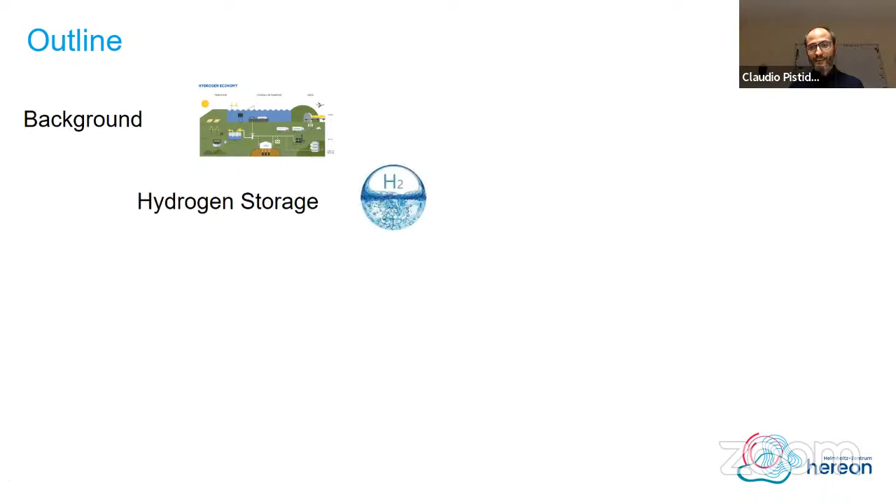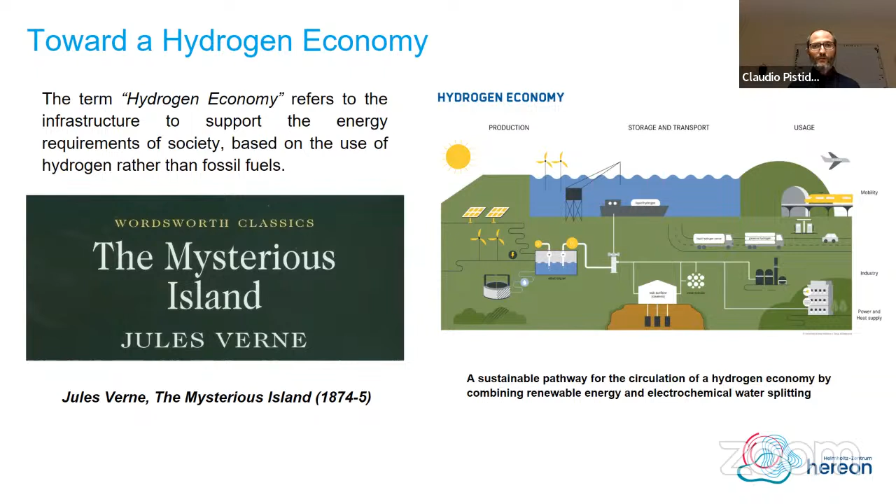Now let's move to a short outline of the presentation. We will speak about why we are trying to store hydrogen, what is in the background. Then we will see what are the properties of hydrogen as an energy carrier. And we will see that we can store hydrogen in liquid media, but also in solid chemical media. We are heading toward a hydrogen economy, that's clear. We know since long that hydrogen could be a really nice, friendly energy vector for renewable energy. So what do we want to do with this hydrogen in our hydrogen economy? If we look at the picture on the right side of the screen, you can see that we want to produce hydrogen in a sustainable manner, for example through electricity produced from renewable energy sources, then do water splitting, and then we have to deliver this hydrogen to several different sectors of our economy. The fact that there are several different sectors calls for solutions that are flexible, solutions that are different but efficient at the same time.

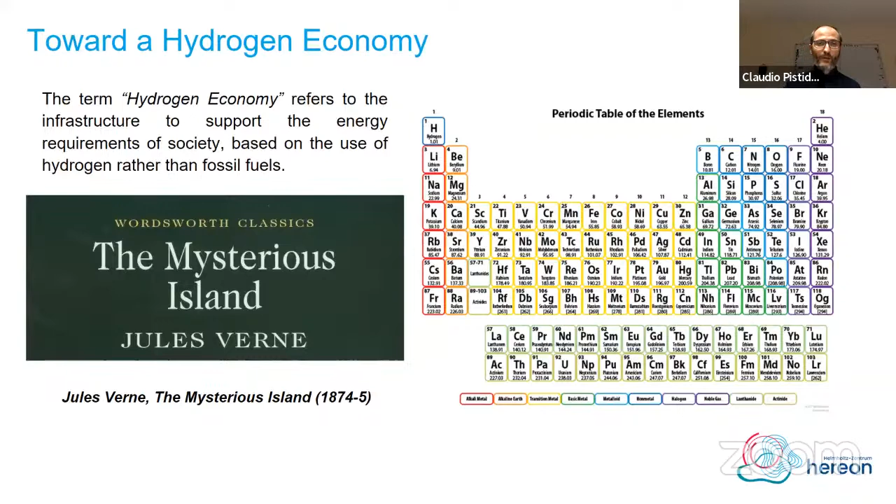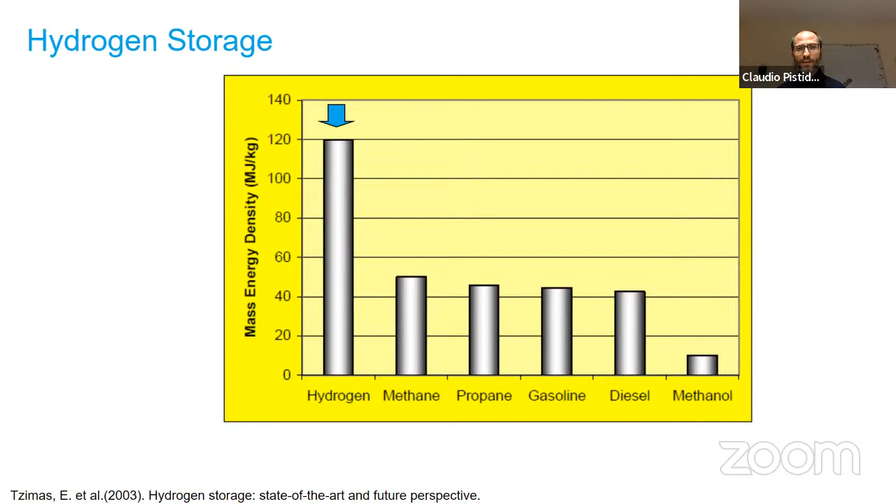Now, hydrogen, if we look at the periodic table of the elements, is located in the upper left corner. So it's the simplest of the elements in the periodic table. We are looking at hydrogen as an energy carrier for a simple reason. If we look at this graph here, where mass energy density of several different compounds is shown, you will see that hydrogen has the highest mass energy density compared with some of the most common fossil fuels. However, this picture is reversed when we look at the volumetric energy density.

Before we were looking at the gravimetric one. So at the volumetric energy density, what we can see is that hydrogen has a rather low energy density, even if we try to compress or liquefy to improve this value.

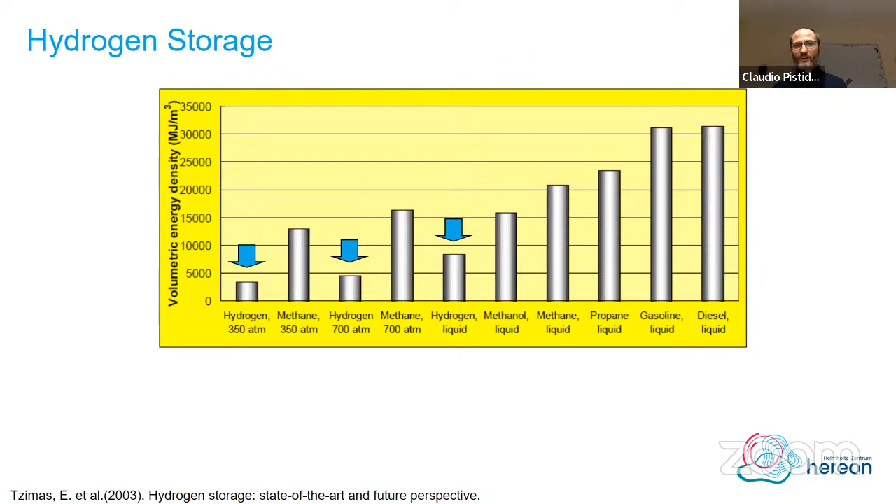Fine, these are general properties of hydrogen. Now we have to find a way to store or transport this hydrogen once it has been produced. There are several different approaches that can be summarized in two categories: physical approaches to store hydrogen, or chemical approaches. On the physical side, we can try to compress gas, liquefy it, compress at cryogenic temperature, or store hydrogen on large area surface materials like MOFs or carbon-based materials. These are physical methods where hydrogen is stored in its molecular form.

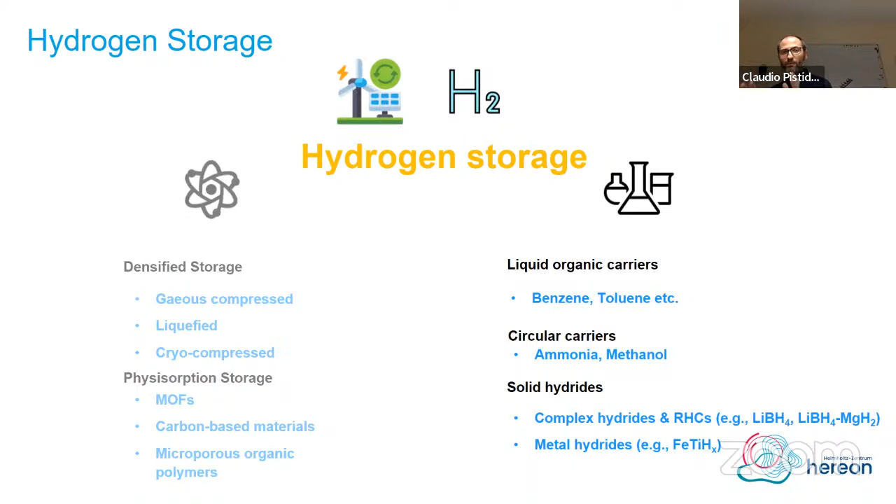However, we can also try to break this hydrogen molecule and store hydrogen, chemically bonding it in atomic form to a compound. So we can have carriers such as liquid organic carriers, for example benzene, toluene, or circular carriers like ammonia or methanol, or solid hydrides, where hydrogen is bonded to a metal or in a complex metal hydride. Now for today, we are interested in the chemical media, so we are looking at this side of the picture.

Let's start here. We said there are several different possibilities to store hydrogen. These two graphs give us an idea - for example, this graph on the left-hand side shows the volumetric hydrogen storage density for metal hydride, liquid organic carriers, ammonia, complex hydride, in comparison to hydrogen storage through physical methods. So we're speaking about liquid hydrogen and gaseous hydrogen.

You can see that the possibility to store hydrogen in chemical media gives us some opportunity to increase the volumetric hydrogen storage density. And if you look at this graph, you can see that this higher volumetric energy hydrogen density is achieved at conditions of pressure that are relatively mild.

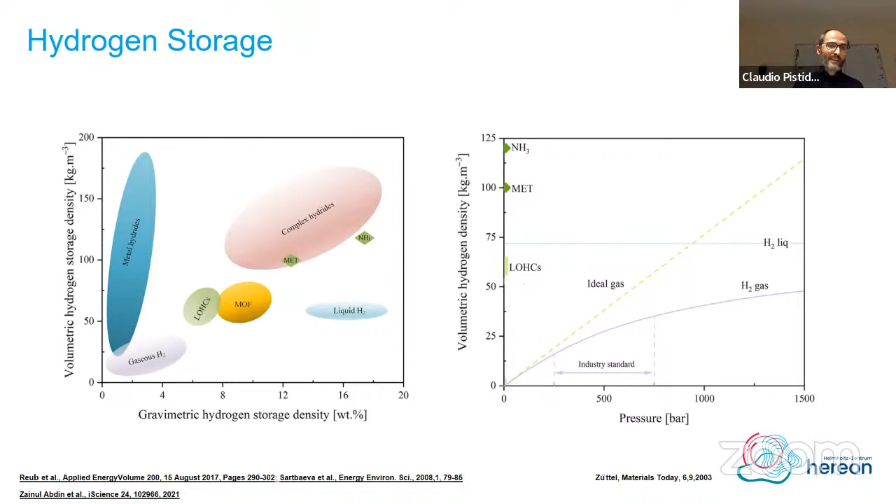In fact, if you want to achieve a high volumetric hydrogen density by compressing the gas, you have to go to extreme pressure, or like in the case of liquefied hydrogen, you have to go to cryogenic temperature, extremely low temperature, minus 253 degrees C. So that was a general picture of how storing hydrogen through chemical media may lead to an improvement of the volumetric hydrogen storage density.

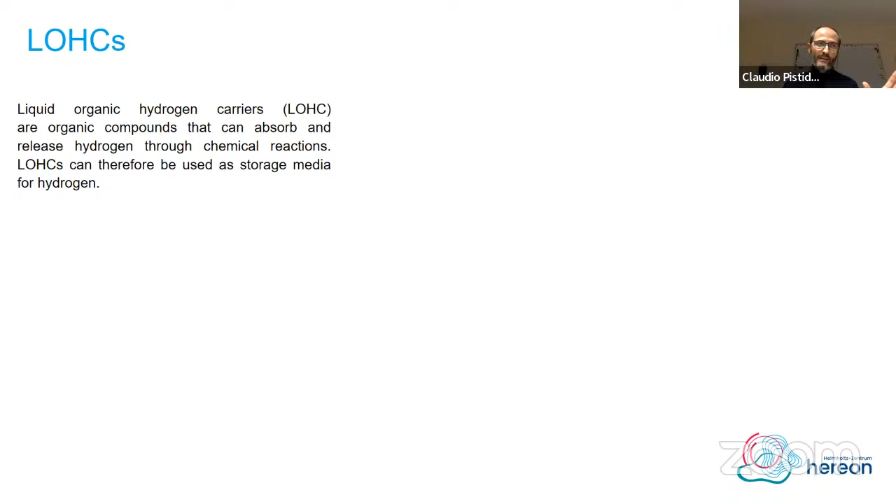And now let's move to the liquid organic hydrogen carriers. Liquid organic hydrogen carriers are organic compounds that can absorb and release hydrogen through chemical reaction. Now, so that is quite nice. So what does it mean? It means that these compounds have an unsaturated C-C bond, double bond or triple bond, where hydrogen can insert itself.

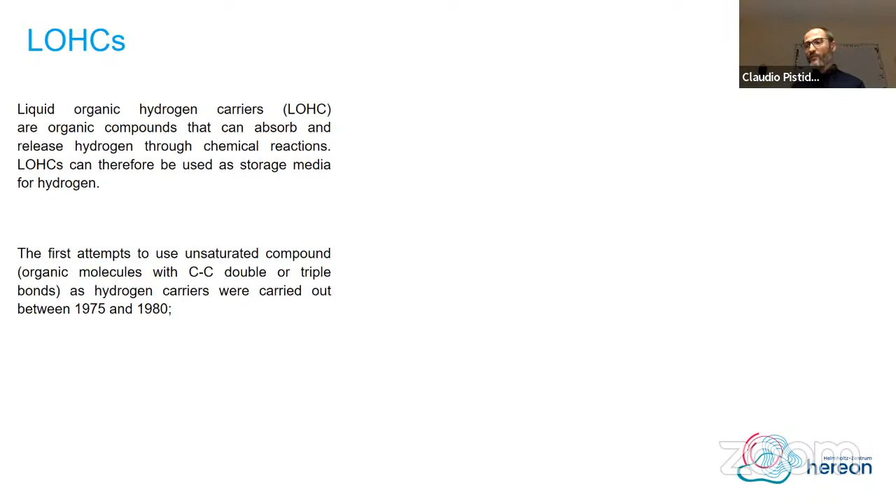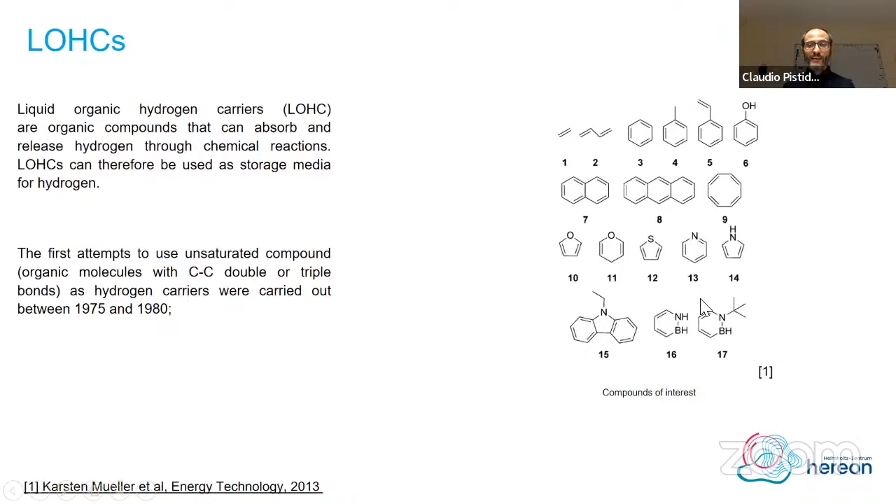This kind of material was studied since 1975, 1980, so it's quite recent. Here you can see examples of compounds that may be considered for such an approach to transport hydrogen. So you can see we go from extremely simple molecules to more sophisticated, more complex molecules.

Now, how does this insertion of hydrogen in this unsaturated bond work? You can see here an example of toluene, where we add hydrogen. And of course, the reaction doesn't occur spontaneously, although thermodynamically it should be favored. But in the presence of a catalyst at high pressure and temperature, what happens is that the hydrogen enters the bonds, and we move from toluene to methyl cyclohexane.

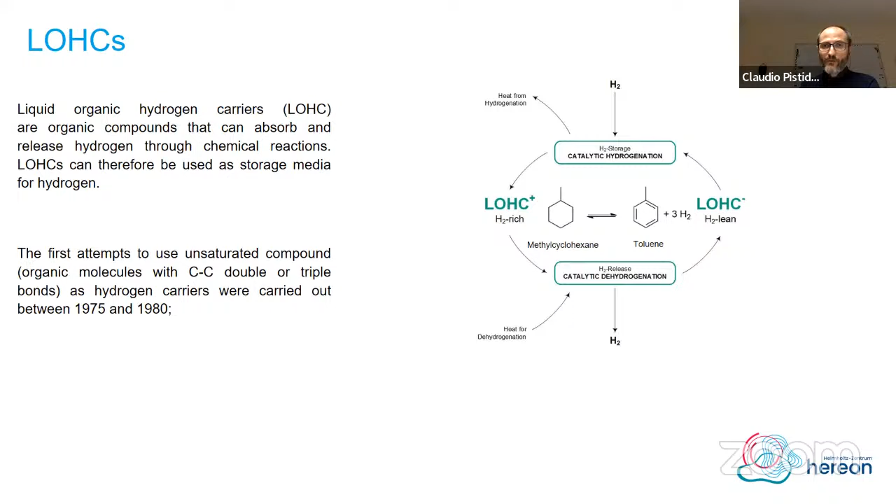And then, although this molecule is stable at ambient conditions, if we want to retrieve the hydrogen back, we use again a catalyst, and we work at low hydrogen pressure, practically ambient condition, but quite high temperatures. And then what we obtain is that we move back to toluene.

Now, here is an example of several different compounds that can be used for storing hydrogen. Some of them were shown previously in this graph. What you see here is how many molecules of hydrogen these compounds can take in. And you can see that this reaction theoretically should be spontaneous, because it's largely exothermic. However, without the presence of a catalyst and appropriate temperature conditions, this reaction doesn't take place, or occurs through sluggish kinetics.

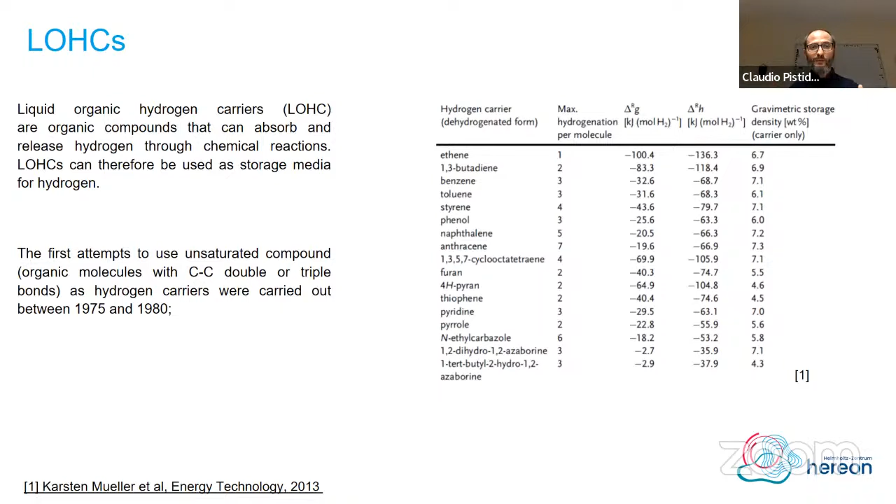Here you can see that the hydrogen storage capacity, expressed as a gravimetric value, goes from 4.3 to something like 7 weight%. This is not bad, but we have to keep in mind that this high reaction enthalpy will be translated later into high stability, and therefore the use of relatively high temperature, leading to a heat management of the storage system that is quite complicated.

Now, what can we say about the liquid organic carrier? The hydrogenation is exothermic. However, we need conditions of 200 to 420 degrees C to make it occur with acceptable kinetics, under a hydrogen pressure between 20 and 50 bar. It's not extremely high, but it's quite high anyway.

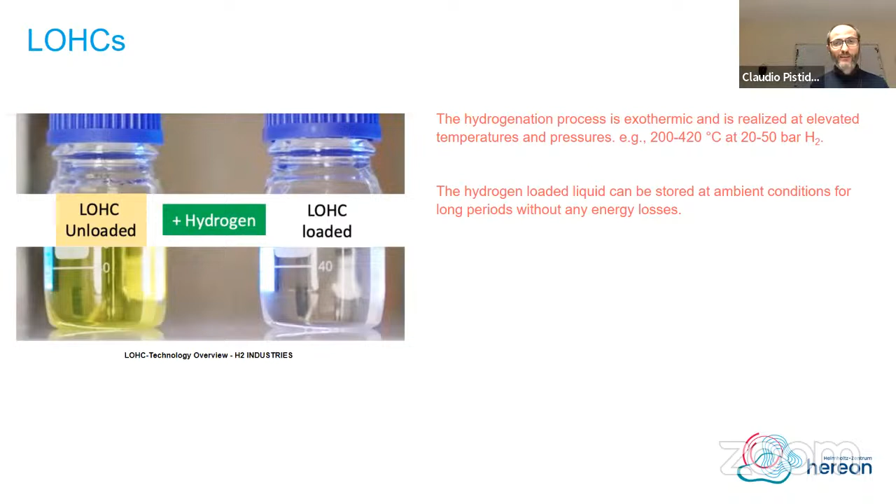The good thing is that once the hydrogen is loaded and the liquid organic carrier is hydrogenated, it's stable under ambient conditions, and you can keep the hydrogen bonded into the molecule for a really long period without anything happening. There is no loss of hydrogen, so the handling of this material is quite simple compared to gaseous or liquid hydrogen. Neither high pressure nor extremely low temperature are necessary.

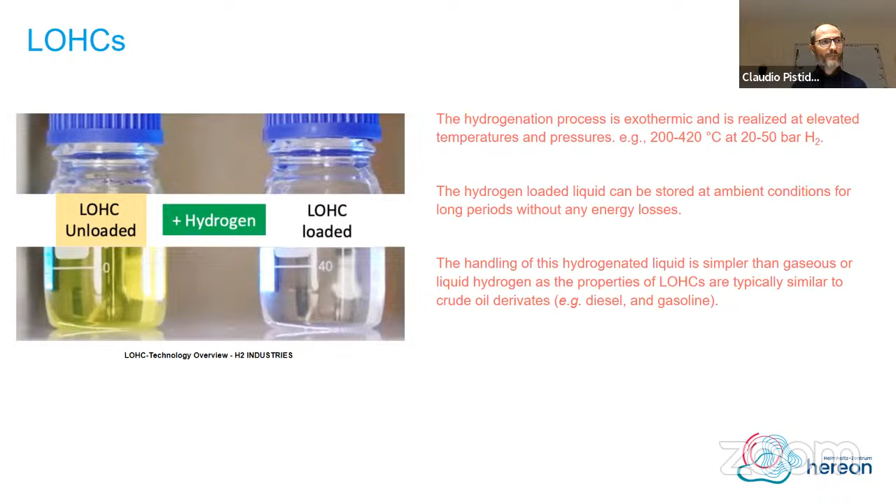In particular, these liquid organic carriers behave like some of the most common fossil fuels, like diesel or gasoline. So it's easy to transport, easy to pump, and no extreme care is necessary for handling them.

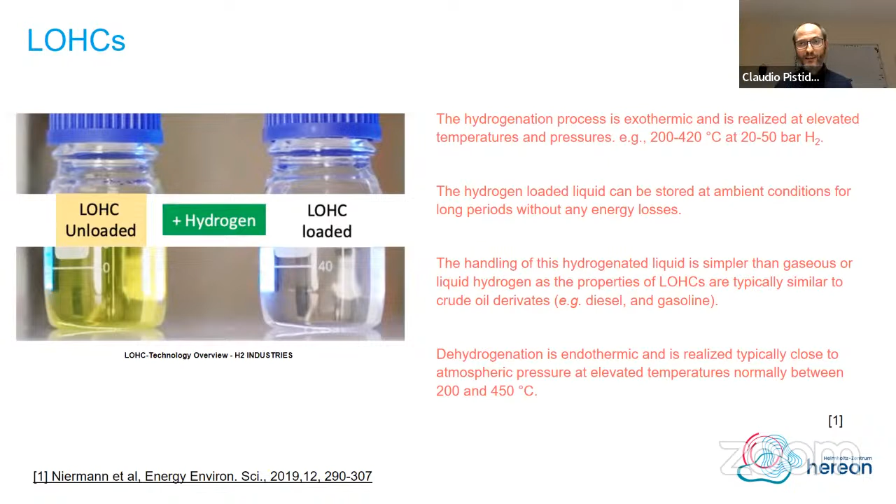On the other side, for dehydrogenating we have to provide high temperature and high hydrogen pressure, 200 to 450 degrees C, but the pressure is nearly ambient. What we can say more is that due to side reactions, once you cycle - you charge hydrogen, you discharge, you charge, you discharge - some of the capacity of this carrier is lost, and after a while the replacement of the carrier or of the catalyst utilized becomes necessary.

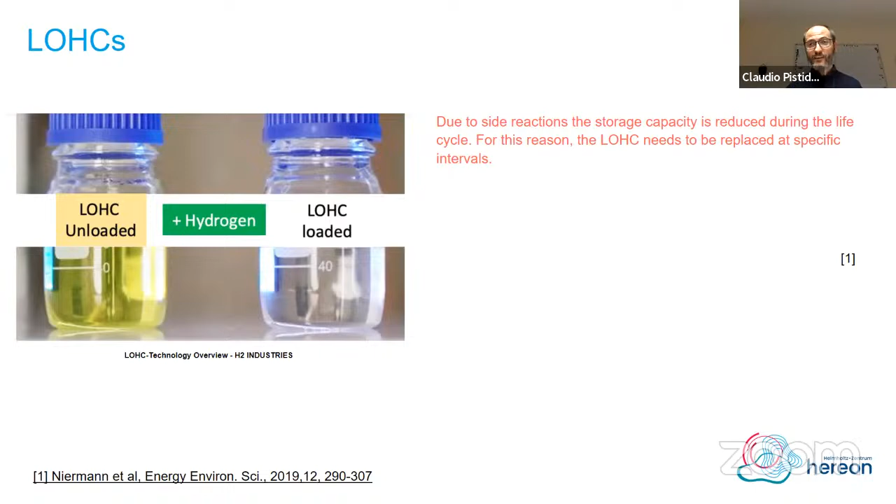Now, ammonia. Ammonia is something we are more familiar with because it's already used abundantly in our industry. We know, for example, that ammonia stinks terribly. What we don't know is that ammonia is the simplest hydride of nitrogen. We also know that at ambient conditions it's a gas, but when you increase the pressure to 9.2 bar, it turns into a liquid.

Once it's liquid, it contains a large amount of hydrogen - we are speaking about 17.6% in mass. And thanks to the fact that it's a relatively dense liquid, we have a volumetric hydrogen density that is 45% higher than the density of liquid hydrogen.

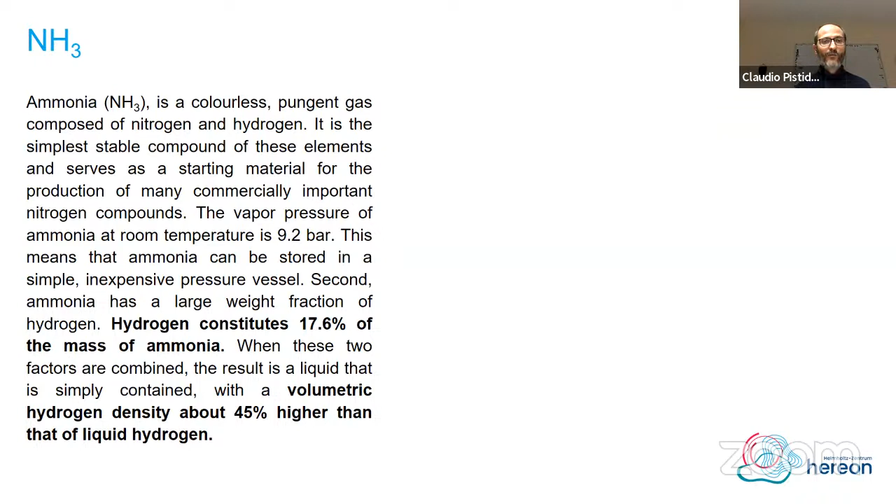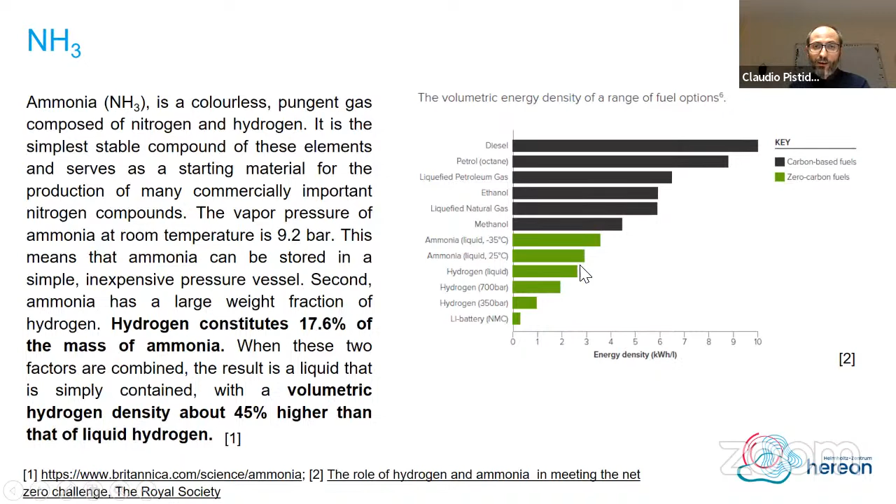What does this mean? If you look at this table showing the volumetric energy density for several different fuels, you will see that ammonia in the liquid state, at minus 35 degrees C, has a volumetric energy density higher than hydrogen in the liquid state. One is at minus 253 degrees, the other at minus 35, and already at ambient condition, in the liquid state, the volumetric energy density of ammonia is higher than liquid hydrogen.

So once we have stored green hydrogen into ammonia, what can we do? We can take this ammonia and burn it in an internal combustion engine - no carbon dioxide is produced, most likely NOx, but we have to check that. Or we can use this ammonia and crack it to produce high purity hydrogen and then feed a fuel cell. These are the two possibilities.

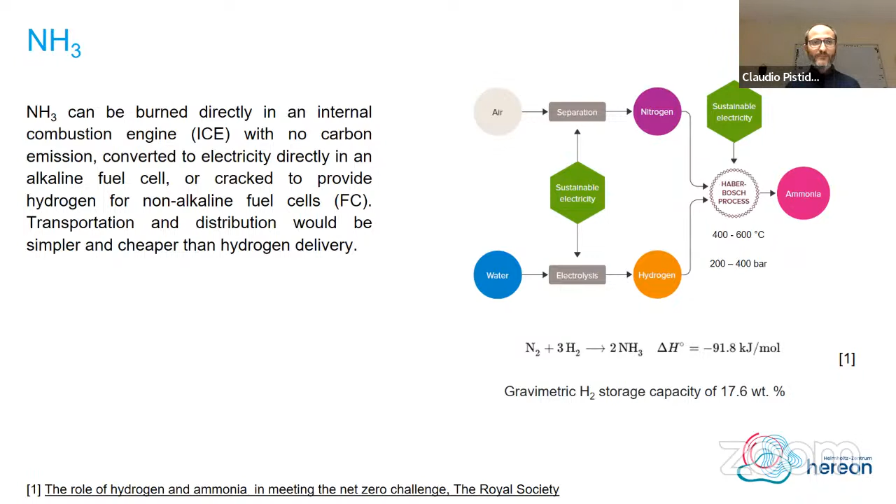So we say we can crack ammonia to feed a fuel cell. If you're speaking about a PEM fuel cell, we have to pay extreme attention to the purity of the hydrogen flow, also because a few ppm of ammonia will badly damage our fuel cell. So the cracking and purification of the obtained hydrogen stream is a crucial aspect of this process.

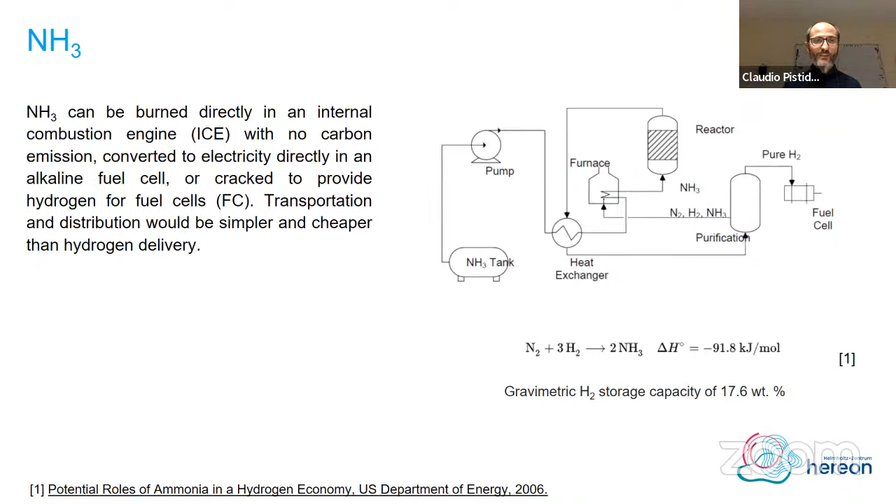Now, this is one of the smallest bottles of liquid ammonia that you can find on the market. What we can say is that the production of ammonia is already happening at the industrial scale, because it's used as a fertilizer, as a refrigerant, and in the pharmaceutical industry. So it's something available on the market in large quantities.

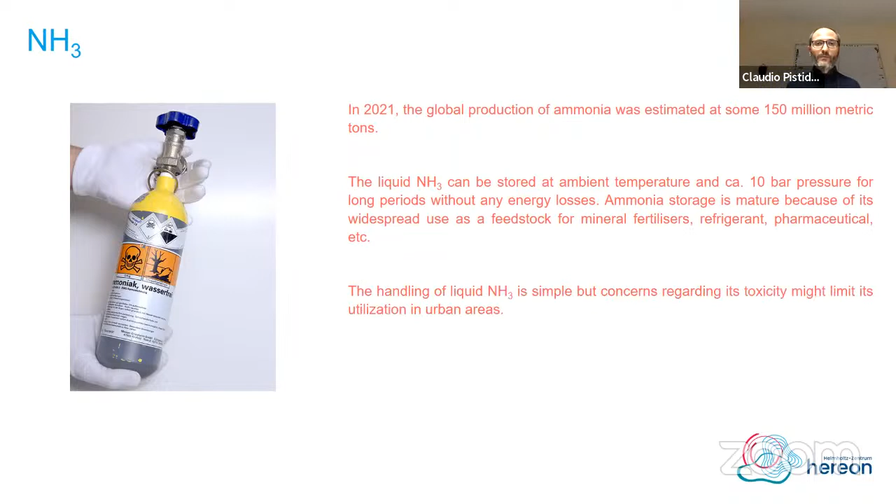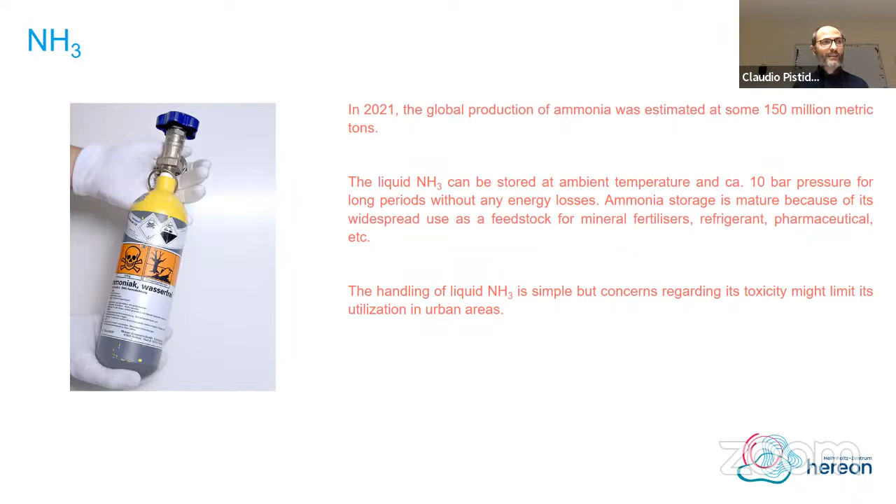Now, the handling of liquid ammonia is relatively simple for industrial people with an industrial background. For normal people, it's not, because it's a toxic gas. Therefore, its application in urban areas is something that is a little bit constrained for the future.

Now, given the high volumetric energy density of ammonia, it's a good candidate for seasonal storage of energy, and therefore has the potential to be utilized immediately for energy storage. Also, the possibility to produce ammonia where renewable energy sources are available and then ship it over long distances is something that plays in favor of using ammonia as an energy vector, or hydrogen vector, for the future.

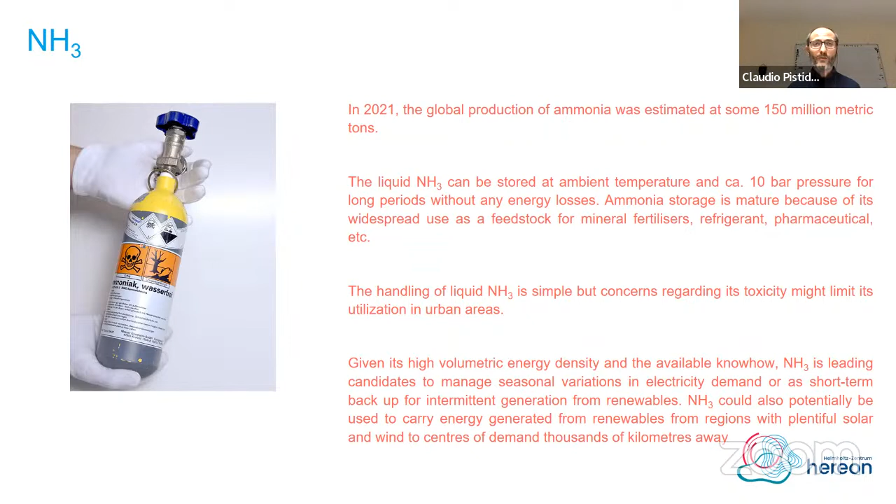Now, metal hydrides - there was already a presentation last week about metal hydrides.

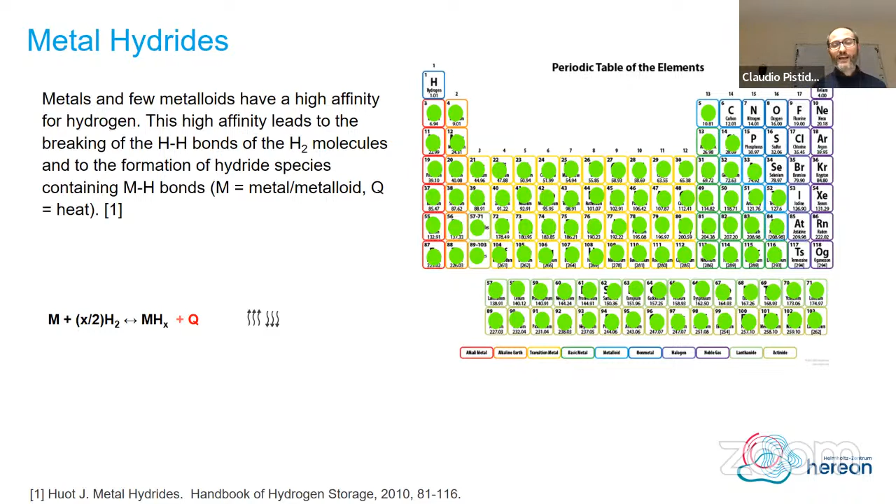But what are the elements that can form a metal hydride, M-H bond? As you can see, it's a large part of the elements reported in the periodic table.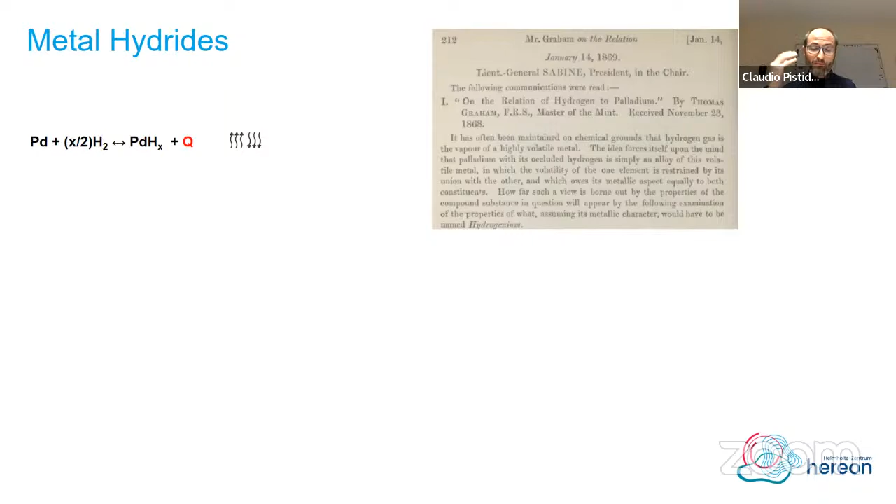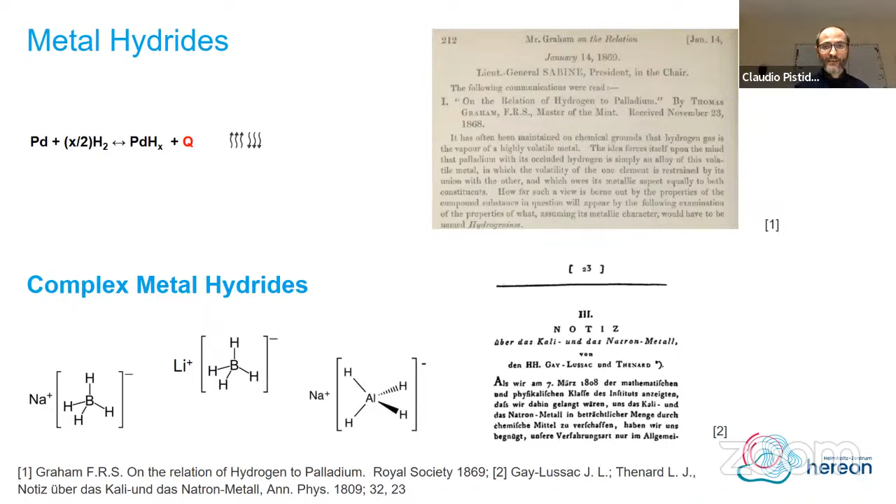We have several different kinds of metal hydride. Simple metal hydrides, like palladium hydride, discovered by Graham in 1869, really long ago. But we also have more complex metal hydrides, like sodium borohydride, lithium borohydride, alanates. These compounds are also really old, but only in the 1950s and 60s did they start being considered as potential hydrogen carriers. Before that, they were just considered a laboratory curiosity in chemical labs.

Then, since the 2000s, a new approach has been developed, because complex metal hydrides have a really important property: they can store large quantities of hydrogen, but are rarely fully reversible. And that is an issue, because what we want is to create a reversible storage system.

So what was developed in several different centers, among which our center, are the so-called reactive hydride composites, where different hydride species, of which one is the complex metal hydride, are combined together to form a system that still has high hydrogen storage capacity, but is fully reversible and has thermodynamic stability lower than that of the single compounds. This is a great advantage, and it's something that is continuously developed.

But as you heard, this approach was brought to practice in the 2000s, so it's a relatively young approach compared with, for example, the Haber-Bosch process we saw for ammonia, which is 100 years old. Now, why store hydrogen in solid state in the form of metal hydride?

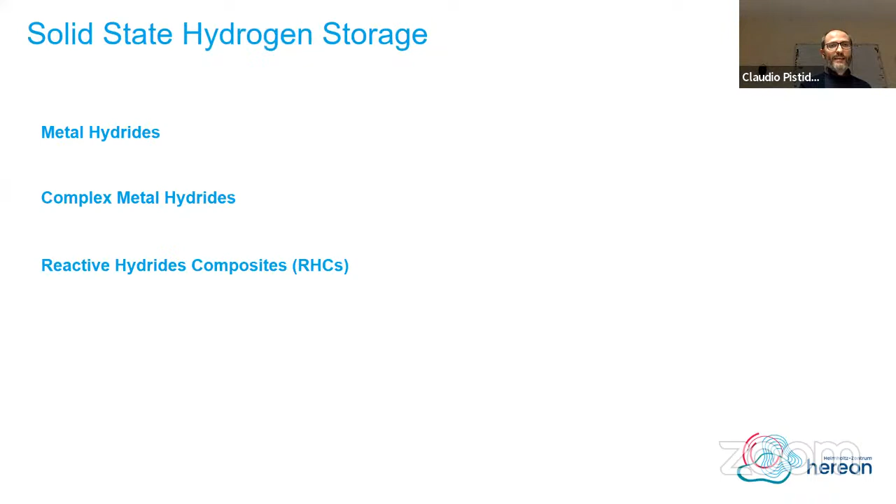If we liquefy the hydrogen, the tank shrinks to only 84 liters. But if you use a metal hydride, this tank can get as small as 40 liters, perhaps a little more, but extremely small. So your hydrogen is confined in something really tiny compared with storage in compressed or liquefied form. This is one of the main advantages of using metal hydride.

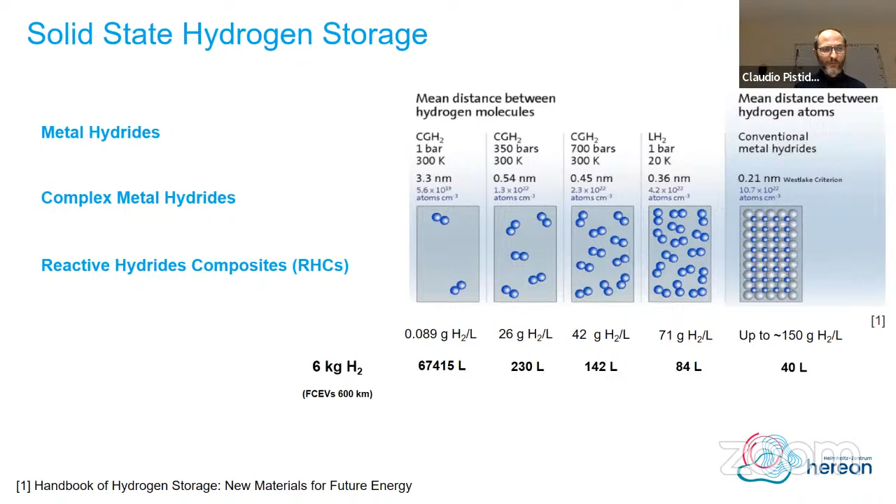Moreover, the thermodynamic properties are really broad, because the chemistry of metal hydride is really broad. Different conditions, different applications—so a really huge flexibility in using metal hydride in different applications.

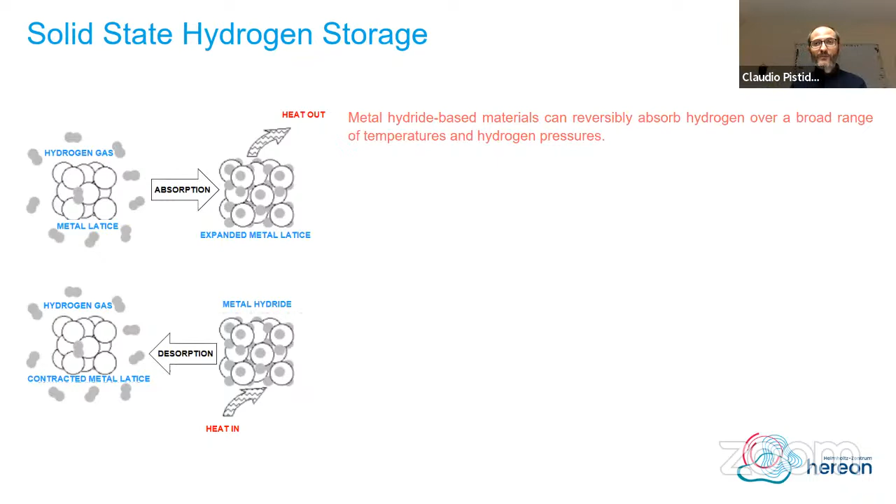Now, what can you say about metal hydride? Metal hydride-based material can reversibly absorb hydrogen over a broad range of temperature and hydrogen pressure. The loaded metal hydride can be stored at ambient temperature under an inert atmosphere for long periods without any energy losses, just like in liquid organic carriers or ammonia.

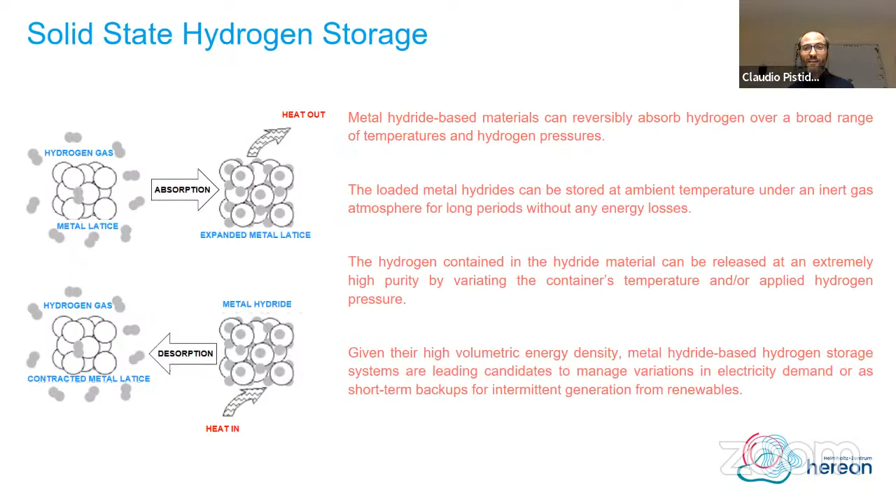The hydrogen contained in the hydride material can be released at extremely high purity by varying only the container's, the tank's, temperature or pressure. So it's super pure, so there's no problem coupling with a fuel cell, no problem of poisoning the fuel cell. Given their high volumetric energy density, metal hydride-based hydrogen storage systems are leading candidates to manage variation in electricity demand or short-term backups for intermittent generation from renewables. This is something extremely important.

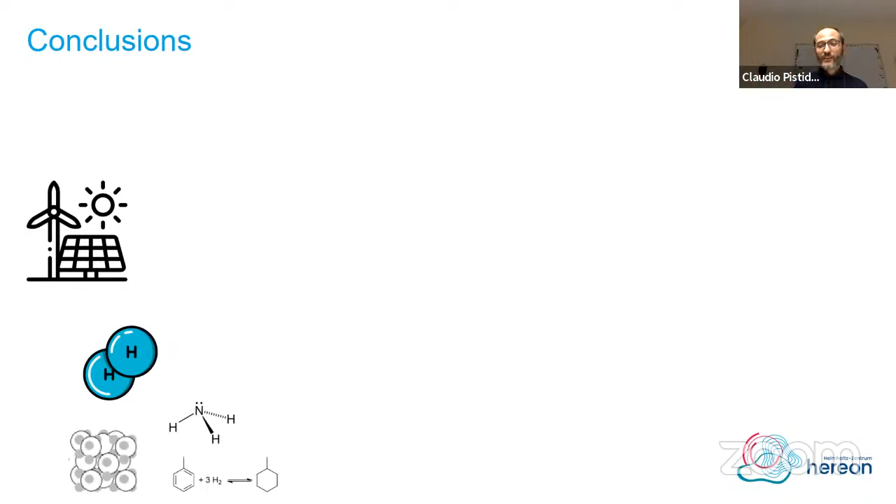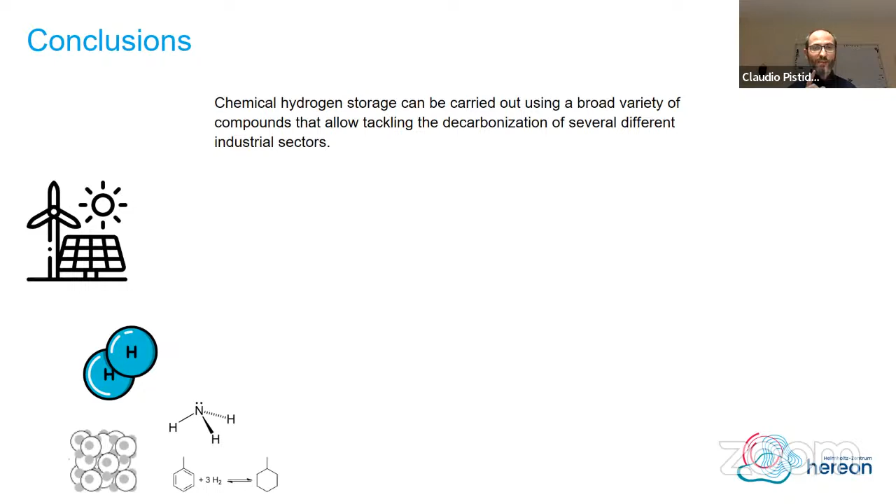So now I've reached the end of my presentation and we have to conclude. What we want to do is use a renewable energy source to produce hydrogen, and then find a chemical medium to store and transport this hydrogen. We saw several different possibilities, and there is not a single winner—that is clear. Chemical hydrogen storage can be carried out using several different compounds, and these compounds have different properties that allow us to tackle the decarbonization of several different industrial sectors. But we're speaking about industrial sectors that cannot be directly electrified. That has to be kept in mind.

Among them, there was not a winner, but certainly ammonia is a strong candidate because it's already industrially available in large scale, and there is a really huge know-how behind how to synthesize ammonia and how to crack ammonia. Of course, the possibility to use liquid organic carriers or metal hydrides gives us an additional degree of flexibility that is what we need to achieve a mature hydrogen economy.

Moreover, beside designing high quality, high performance material, what we need is support in international collaboration, support from politicians, from organizations, and we need to bring this solution to the scale that is required to make a real impact. Now, I would like to thank you all for your kind attention, and I'm looking forward to your questions.

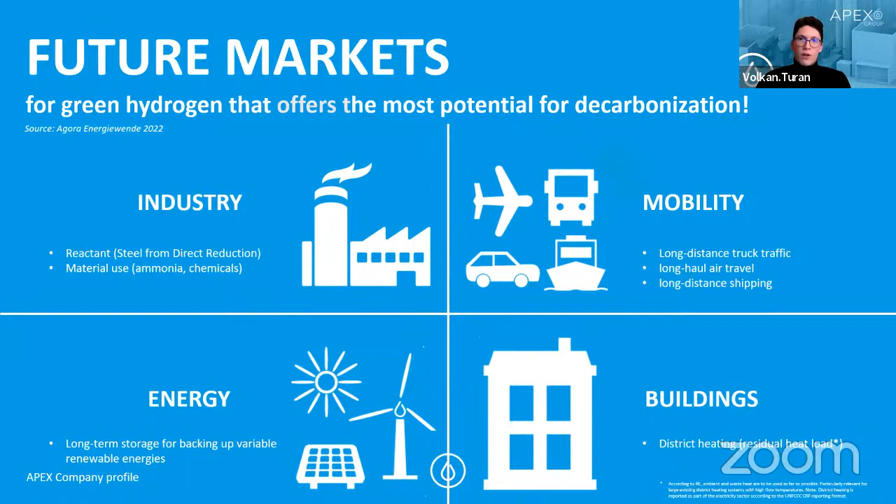I wanted to bring two short examples of what we are currently building or what is already in construction. The perfect example for steel or industry application is CO2 neutral steel production. We partnered up with ArcelorMittal and built an electrolyzer to produce green steel, and I brought a few key indication parameters.

For me, the most important and motivating parameter is the CO2 reduction, which here is 21,000 tons per year that we can save with this plant, which is one of the few currently in production.

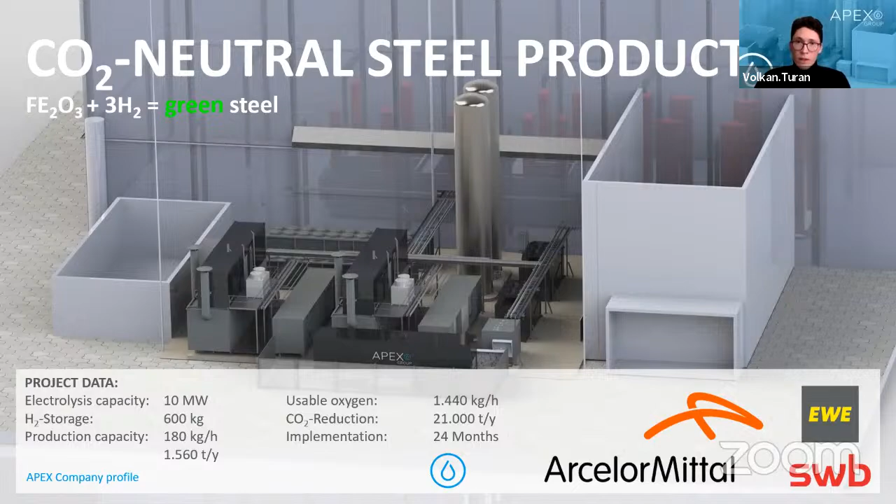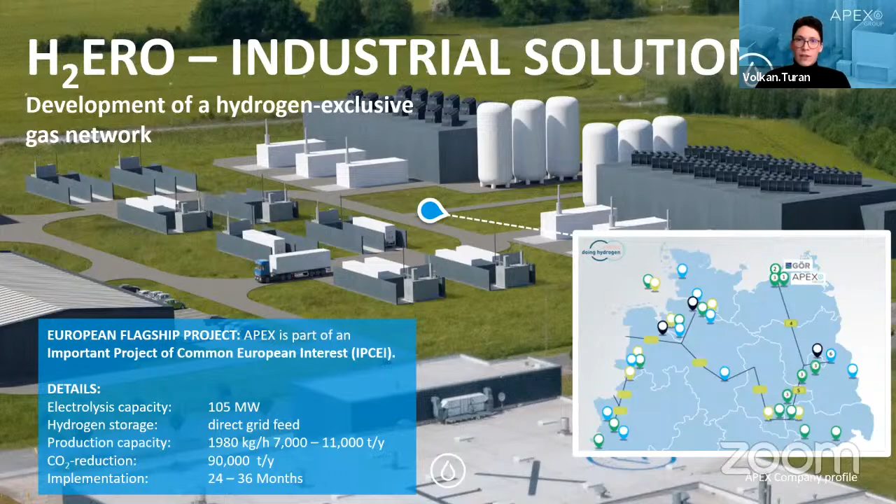Another one we're quite proud of is the so-called H2Ero, a European flagship project. We are part of the IPCEI consortium developing a hydrogen-exclusive gas network in northern Germany, providing a large amount of hydrogen fed directly into the grid. The CO2 reduction here is 90,000 tons per year, which is quite promising and motivating for all the work we're doing at Apex.

We already have other companies partnering up and using the energy, hydrogen, and heat that we're producing on this industrial park. We're quite proud about that as well.

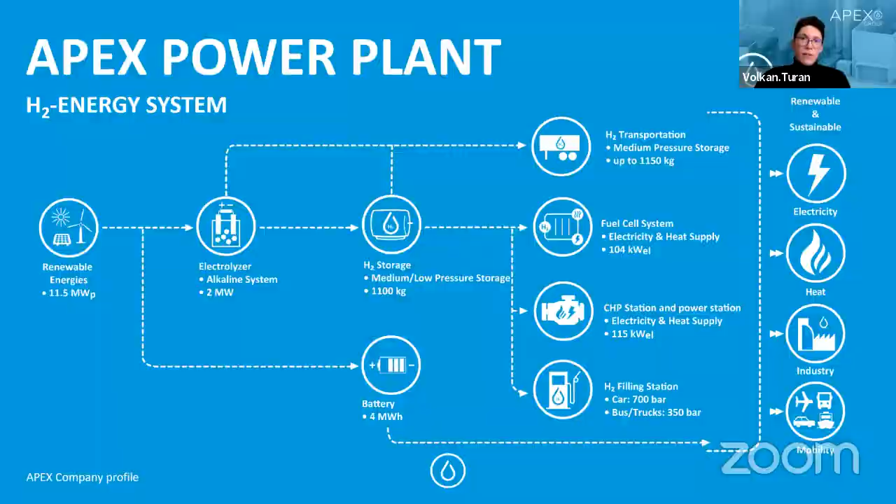This has led us to already having some customers. One of my favorites is Amazon, because they have a logistics center close to us that we currently supply with hydrogen. We even have the first right to pitch for all German locations to supply them with hydrogen in the future.

That is everything I wanted to say to introduce the company. I hope I sparked some interest in investigating further on our website. But I would now like to jump into the topic of hydrogen storage.

Before going into the chemistry, I'd like to give a brief overview of what Apex is doing, because we're not focusing only on chemical storage, but on several storage technologies.

Here you see three different pictures: stationary compressed gas storage on the very left, a portable compressed gas storage and fuel storage system - an entire container where several tanks are stacked to increase the amount of hydrogen stored - and on the right, chemical storage. I have to apologize, this isn't the actual picture of how it looks inside the containers, since it's our IP at Apex, so we don't provide 100% insight into what's inside.

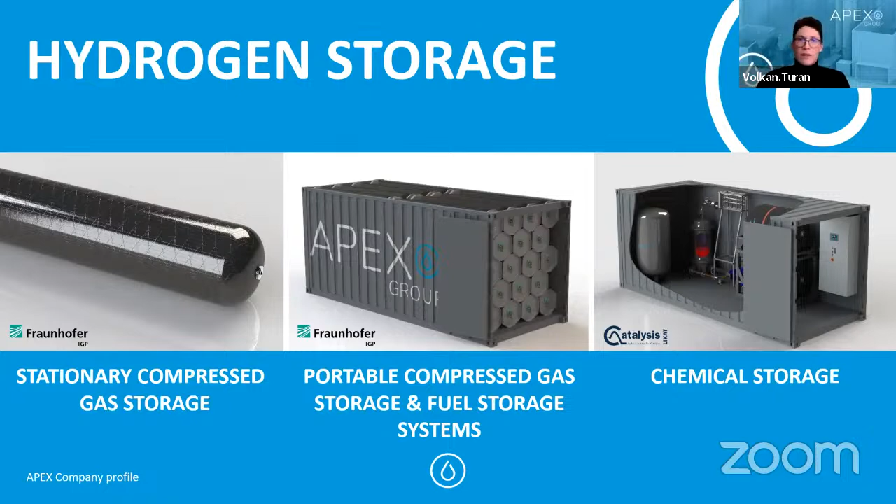Luckily, as Claudio said already, there's currently no winner so far in the hydrogen storage competition, let's call it a race. And we actually don't see them as opposing technologies, but rather as complementary, because for each project or each application, there can be several products or technologies that have their pros and cons and advantages for the specific application you'd like to use it for. That's why we think they're all actually complementary.

I'd like to show this slide, which I think is quite important, because sometimes I get the impression that whenever people are talking about hydrogen storage or hydrogen technology, the only thing they focus on is, unfortunately, always the energy density, as the only criterion considered in the discussions. But in fact, there are countless parameters that should be included in such considerations.

We think at Apex that the energy transition actually means not winning a competition, but rather diversification of technologies. So that means every technology may have their part of the entire share, or a share of the entire market, because every technology has their advantages.

I brought here a few of these parameters which I think are quite interesting or important. Besides the energy density, Claudio was talking already about the gravimetric and volumetric energy density, but we think there's way more, especially the carrier material, especially if you're talking about chemical storage. You have to check the availability of the carrier material, the price, how about the handling, is it flammable, what's the state of aggregation, can you integrate it into current infrastructure already?

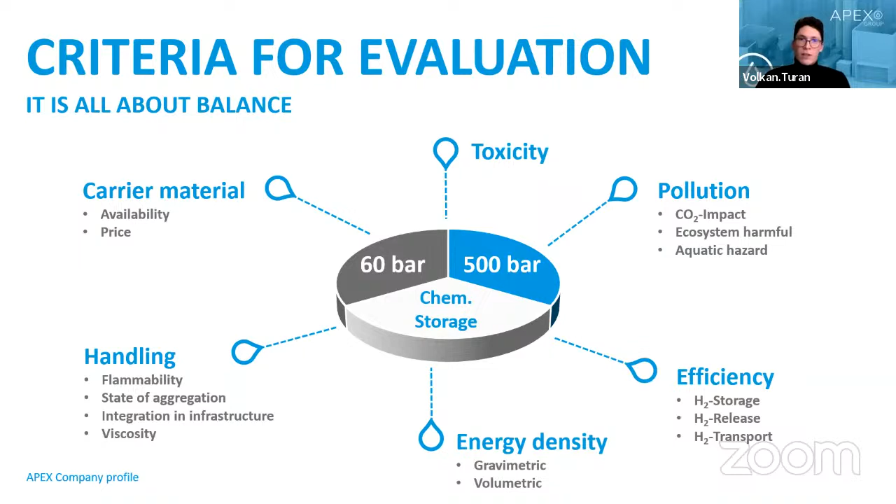The cool thing about our chemical storage technology is that we have a pressureless storage of hydrogen in liquid or in solid form, meaning either in a salt or in a solution. What I want to highlight is that although I'm talking about salts, we have to keep in mind that I am not talking about storing hydrogen in a salt cavern. What we're doing, I'm going to show on the next slide.

What we're doing is storing hydrogen chemically, as we've seen with the LOHC just a few minutes ago, as a reversible battery. We do it with a salt system, where we chemically add the hydrogen to it. That makes it completely non-toxic, non-corrosive, non-flammable, and completely safe. It's integrated into infrastructure quite easily. We even have the chance to have it as a saline solution, a brine, which we can pump through pipes, for example. Through all these advantages, I think we can achieve quite high acceptance due to this easy handling, and especially the lack of necessary safety equipment or safety measures.

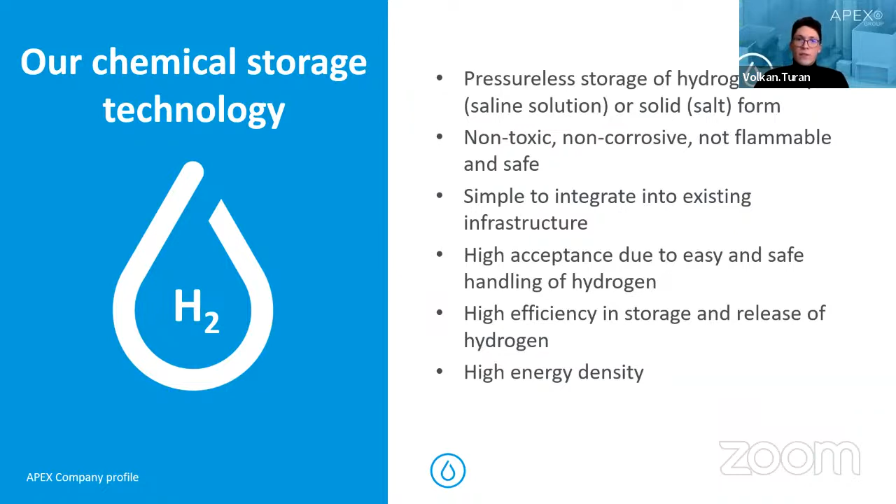Another cool thing is that our system is quite efficient in storage and release of the hydrogen. I'm going to show that on the next slide. Dependent on the form we use, whether liquid or solid, we can achieve different energy densities.

The empty battery is a salt, known as bicarbonate. The interesting thing about bicarbonate, potassium bicarbonate is the salt that we're using, is that it's quite well known, and there's a lot of people who even use it in their kitchens. This is well known in the industry since decades.

And what we can do is we can now load this bicarbonate, the empty battery, with our hydrogen, and get the hydrogen enriched form, the so-called formate. The formate is a derivative of formic acid, but that has nothing to do with the formic acid itself, so it's not suddenly corrosive or toxic. It's only the salt derived from the formic acid. But this is our enriched form. And as I said, the entire cycle makes hydrogen suddenly pressureless and safe and non-toxic.

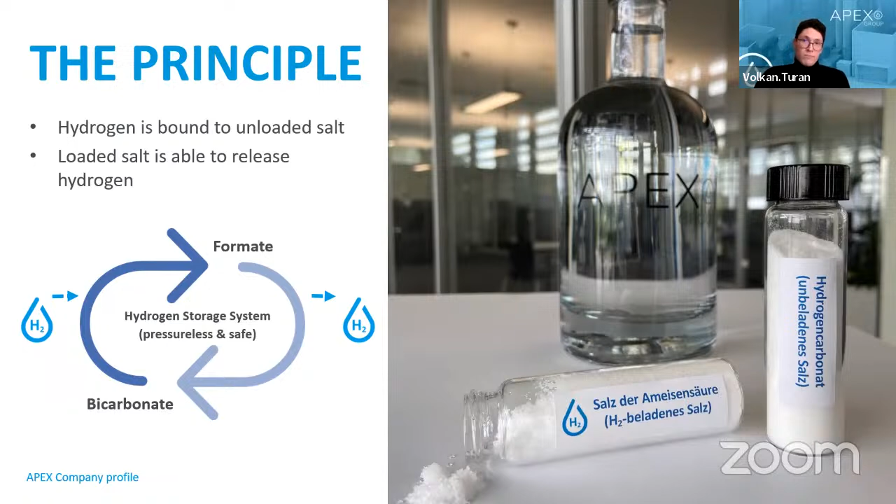On the next slide, I was talking about the two different ways to store hydrogen in our salt system, which could be either in the crystalline salt, as I just showed in this vial, or on the other hand, we can dissolve the same salt into water to have an aqueous solution, a brine. The advantage of having this easy interchangeable state of aggregation gives us several advantages and possibilities, and even some room to interact in different use cases. For example, dissolved in water, the salt is of course easy to pump, it's liquid. But on the other hand, it decreases in energy density, because you have to imagine...

In this very small vial, I didn't bring the numbers on slides, but I can tell you, Claudio was talking already a lot about energy density. This small vial, the salt in its crystalline form, has a volumetric energy density which corresponds to compressed hydrogen at a pressure of around 800 bars. So all the comparisons we've seen in the slides before - and that is why I'm very happy about the slides and presentation, which was awesome from Claudio, I really liked it - shows that it's not as energy dense as, for example, ammonia or methanol, or even liquefied hydrogen, but it's still better than 700 bar compressed hydrogen. So we think it's still favorable to use such a salt system compared to high pressure hydrogen gas.

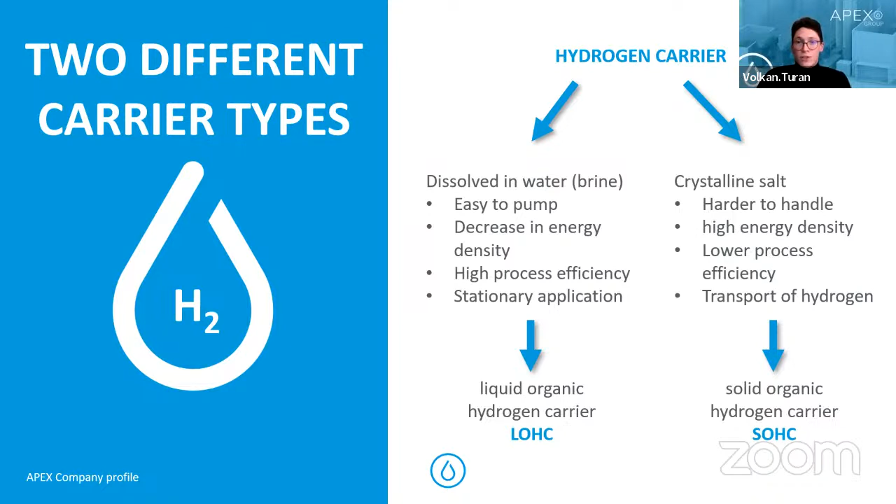So, said all that, I brought you these two use cases, which is either the stationary energy storage or the energy transport. These are the two different use cases where our system is applicable.

If we check out the different possibilities, or why we would use them in the two different use cases - in stationary storage, of course, we use them for example for the seasonal storage of renewable energy. So you have renewable energy, you have to store it, let's say from summer to winter, and that can be the seasonal storage. You can even have decentral applications for hydrogen. So I think the stationary makes quite a lot of sense.

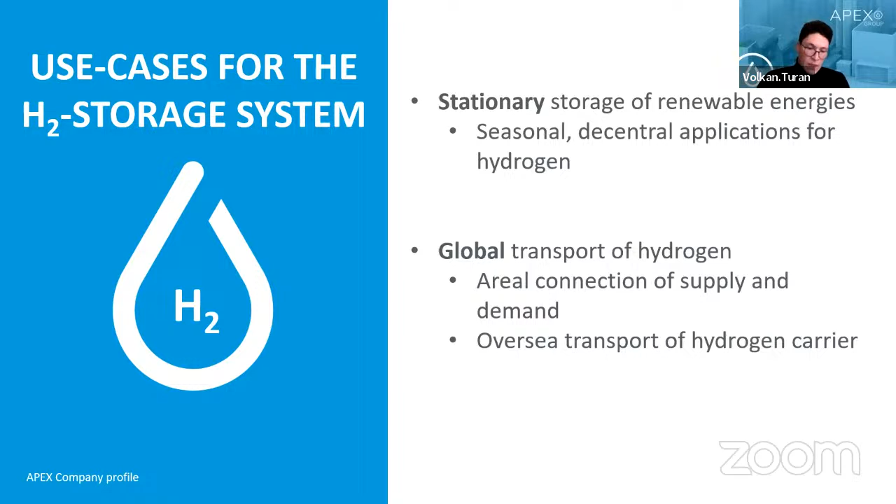And the other thing that Claudio already mentioned, considering ammonia for example as a hydrogen vector, is the global transport of hydrogen, which has this appeal of the areal connection of supply and demand and the oversea transport of hydrogen carriers. Why is that? I think this is clear to all of us - the distribution of hydrogen is actually currently still a problem.

I brought you this picture, which is from the International Energy Agency. I don't want to discuss all the numbers on the legend on the right side regarding different colors, but I want to highlight that we can see clearly from this map that there are areas in the world, the red ones, where you can produce green hydrogen way cheaper than in the countries with the blue color, for example. On the left side, I wrote that the high demand of hydrogen is especially in the industrialized countries. If we check, like in the majority of industrialized countries, let's say Germany as an example, or entire Europe, it's not blue, but it's not like a deep red either.

So the problem we currently have is that we would have a higher necessity of hydrogen than we can produce ourselves, which means we have excess energy in other countries that we have to transport to countries that have a higher demand than production capacities. We see, of course, a huge business model there, but not only from the economic or business motivation. I'm still quite a young scientist, so for me the motivation is as well, like saving the world, or at least having a positive impact on our CO2 footprint. But we still see this need, or necessity, of hydrogen transport.

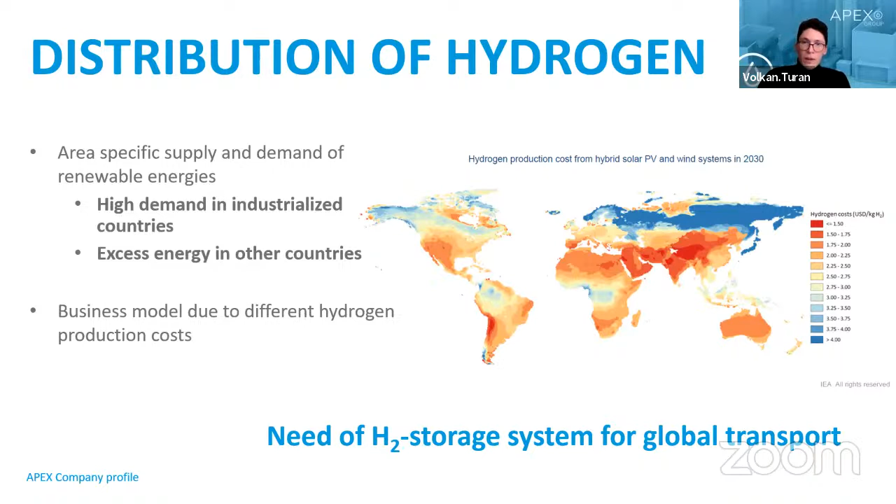As I showed you at the very beginning, Apex has profound know-how already in renewable energies, electrolysis, and handling of hydrogen. Currently, for the same system I just showed you, we are building a pilot plant, a small demonstration plant, which shall show in a bigger scale than only lab scale the proof of concept that it really works.

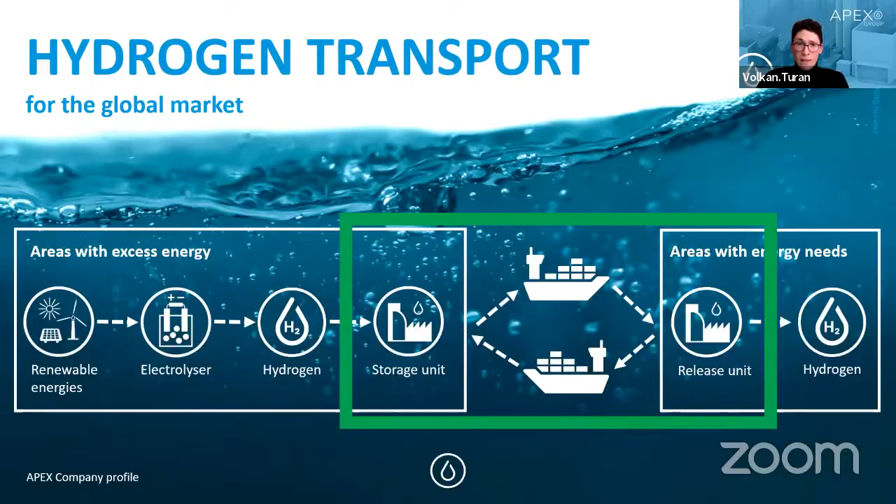Before I end, I just want to mention that we have a huge network of partners already, so this isn't even up to date anymore—it changes every day, there's more and more. It's quite a young and new approach, but we really try to push it in order to get fast to a good technology, because we really see the necessity currently that we have to move quickly to achieve decarbonization or the energy transition that everybody's referring to.

As my last slide, I would like to close with this. We read the name Jules Verne today already, which is a little bit our slogan in the company: water is the coal of the future. This is what we believe. We think we can make a change, can have an impact.

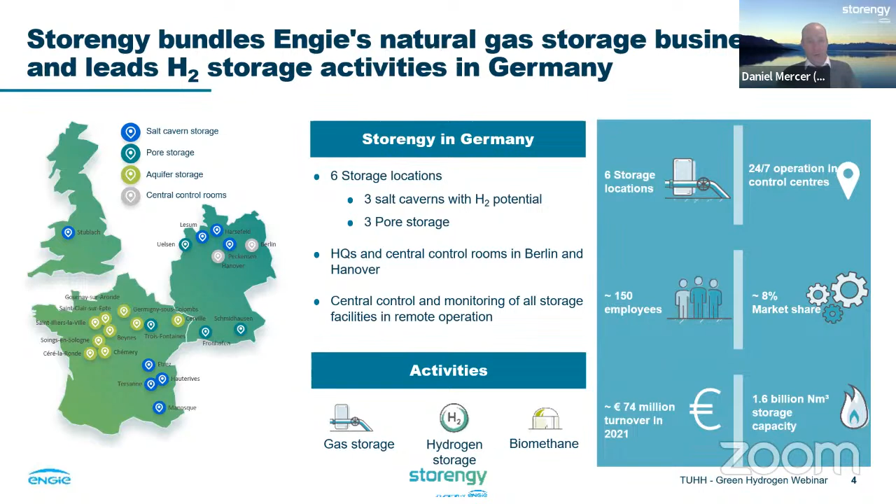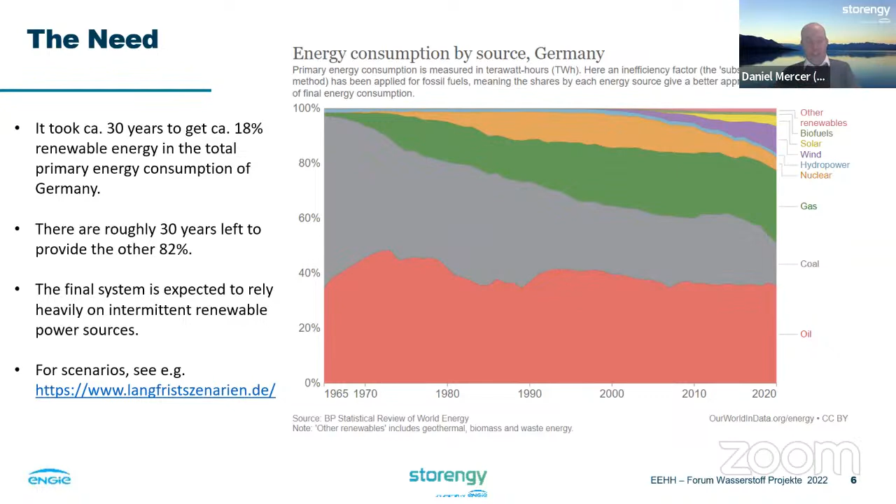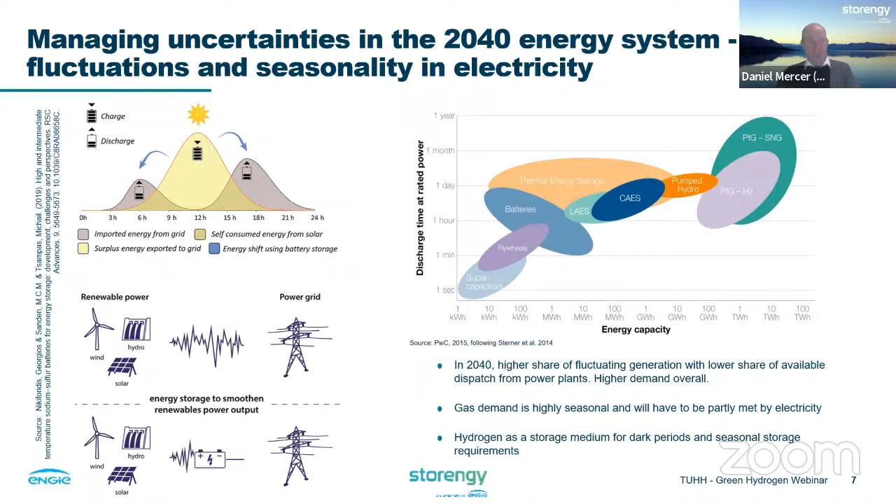So the hydrogen system, as you can imagine, will need lots of renewable energy. We can produce the hydrogen by electrolysis. We have to store it to deal with the variability of production and also the variability of consumption, in various ways as has just been presented, because we want to transport it.

It can be put in a pipe, or put into all manner of chemical solution and then transported by rail or by truck to all the points where it's necessary. It can be used in all different manner of application. In industry, for example, you can use it to produce fertilizer. The steel industry is looking towards hydrogen to decarbonize, to remove its coal needs and replace them with gas and hydrogen.

In mobility, there is the possibility to use hydrogen, especially for heavy mobility. If you're moving a bus around and you have to heat it in the winter or cool it in the summer, and then go up a mountain, you'll find the energy consumption is prohibitive, especially if you're trying to use a battery of electricity, so you want to go towards a molecule.

It could be used for heat. For heat, there are possibilities with hydrogen, there are possibilities with geothermal, and mainly it could be used for power supply. If you look towards the long-term scenarios of, for example, the German government, you'll see that the favorite scenario is one of a very high level of electrification. So the main role given to hydrogen in that system would be, as mentioned, to store the surplus amounts of power we'd have in the summer to supply the energy system in the winter.

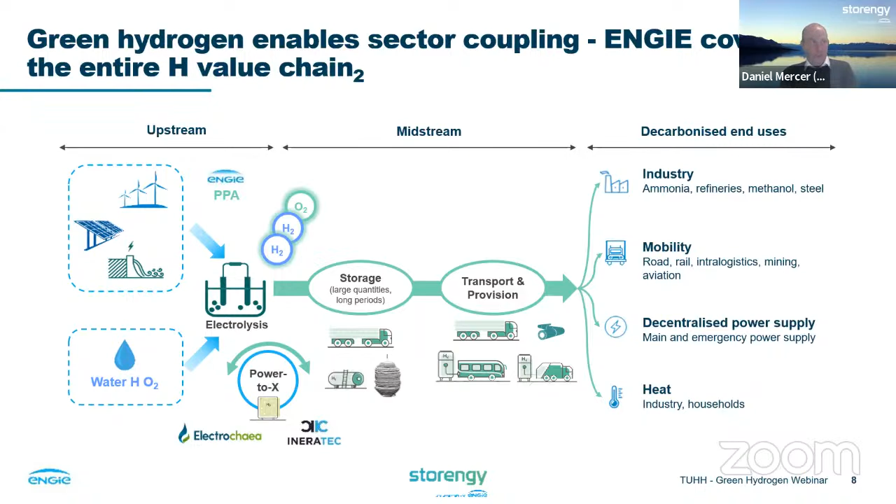It's also, I have to say, a more economic approach to trying to do it without. We can see that today in the sense that in Germany, we have a lot of renewable power in the north with wind, and some solar a bit everywhere, mainly in the south. But we have a lot of wind in the north, and we're trying to bring it from north to south, and we have these rather annoying bottlenecks in the energy grid.

So what happens then? We tell the windmills in the north to please cut themselves off. And then we ask, for example, a coal power plant in the south to start producing when it shouldn't have been producing. The net result is that we're paying for energy we're not using, because we have to compensate the windmill for the fact that we're telling it that it can't sell its power.

We're paying for the coal-based power that we're producing in the south, and we're emitting CO2 that we shouldn't have been emitting. All in all, we have a higher total energy system cost because we're paying for renewable power that we're not using. We're paying for coal to produce electricity instead, and we have CO2 in the system, which has a lot of externalities, as has already been observed.

Should we be in a position, for example in the north of Germany, to produce hydrogen via electrolysis and store it en masse, we could then use it to produce power in power plants. We would not be producing CO2, and we would actually be putting the power from the windmills to use, and therefore the total system cost, with direct and indirect costs, would be much lower. So all in all, the storage of hydrogen allows you to reduce the total system cost.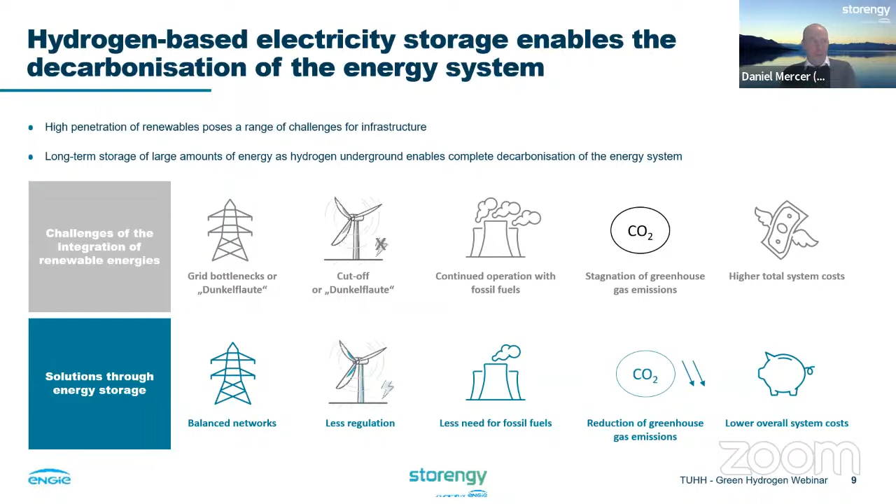How much of this are we going to need? Well, we're going to need a lot of storage, all in all. Why? Because hydrogen is probably not going to replace natural gas in a first step. So most of what we store is natural gas and oil, and we store it underground. We're going to continue to use at least the natural gas for heat, and the first applications of hydrogen are going to go towards transportation and industry. Over time we're mainly going to use it to back up the power system. But in the coming 10 years, we're going to have to continue to store the natural gas that we have, and we're going to then have to develop hydrogen storage capacities.

We have a lot of natural gas storage systems. On this graphic, these are the lines here in dark blue. These are the salt caverns, and here we have the total available storage. I'm showing the salt caverns separate from the rest of the system because, as you'll see later, they play a special role in the storage of hydrogen. The histogram shows you the needs to store hydrogen in the EU plus the UK.

This graphic is for the EU plus the UK in 2030 and in 2050. And as you can see, just the storage requirements that we already forecast already exceed the storage capacities that we have today. So we are going to have to develop more of these storages in the very near term.

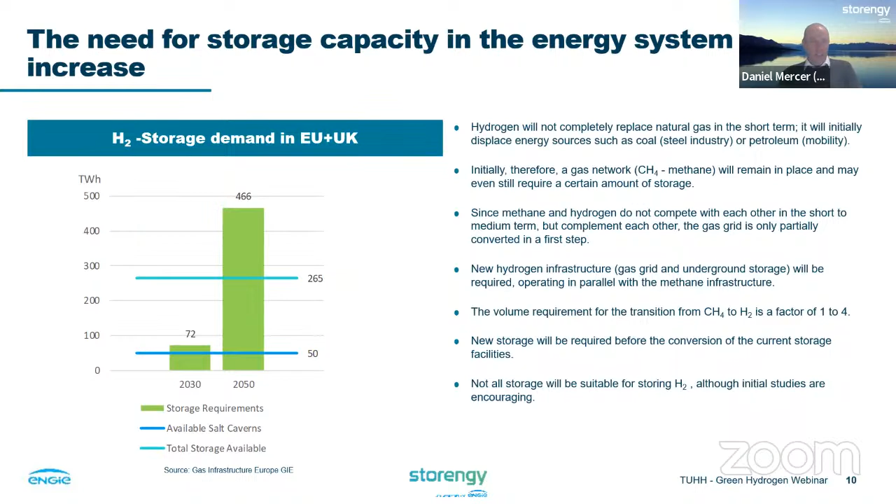Methane and hydrogen, as I said, don't compete with each other, so that's why we're not going to start by just converting storages that we have today, but adding some. One of the tricky realities, as has already been explained in the previous presentations, is that the volume density of hydrogen is lower than, for example, that of methane by a factor of 1 to 4. So the volume of storage we will need will certainly rise, which is also why it's very interesting to find storage technologies which allow us to save some space.

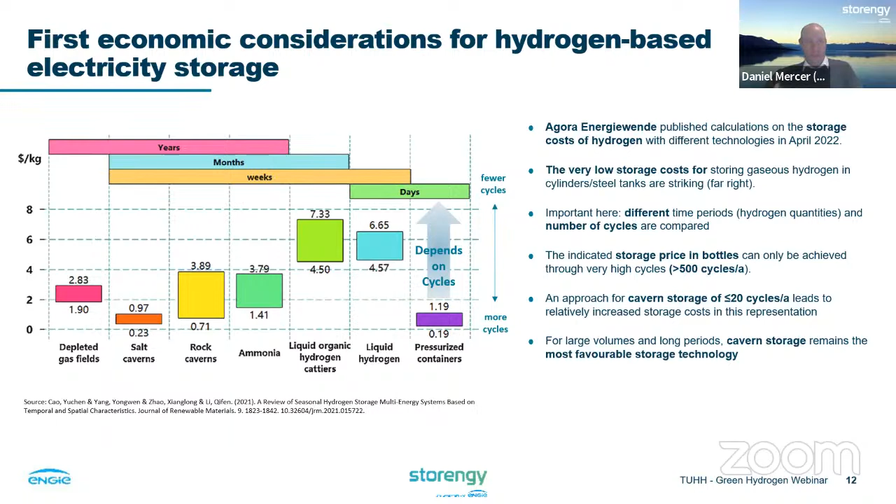Again, the most important point is that it depends really on the cycling you're going to do. Is it going to be something you fill and empty twice a day? Is it something you put on the back of a truck? Or is it a huge salt cavern that you fill and empty maybe once, twice, 3 or 4 times a year?

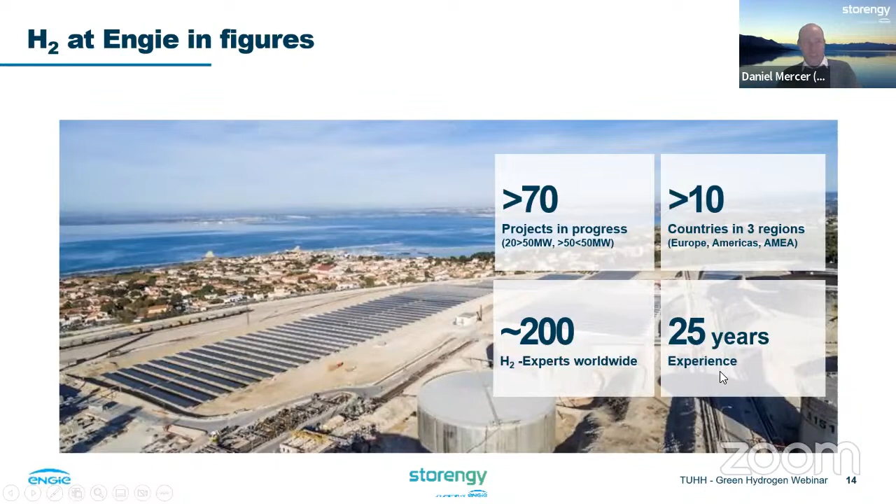Moving on to what we're doing about it at ENGIE, given that we represent 10% of the storage market and that we tend to handle lots of natural gas, we have lots of projects. We have more than 70 in progress, tending to be very large scale. We're doing this in more than 10 countries, with more than 200 people working on it, and we've actually been at it for 25 years.

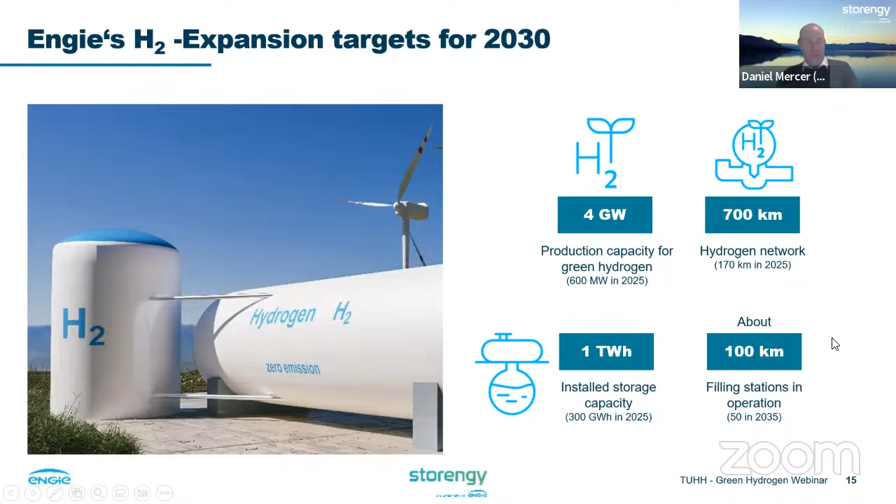We have targets of producing 4 gigawatts at term, 600 megawatts by 2025. We want to build 700 kilometers of hydrogen pipe, 170 by 2025. We want to store a terawatt hour, 300 by 2025. And of course, we want to also provide filling stations for people to use hydrogen transportation.

Where are we doing this? As I said, more than 10 countries, all around the world. We have, for example, in South Africa, a project with some front loaders that do mining extraction. These are very big vehicles, and instead of running on diesel, they could run on hydrogen.

We are also producing hydrogen to produce fertilizer. We're doing this together with Yara, Project Yuri in Australia. This is a case where we would produce ammonia, put it on a ship, and take it to Japan, Europe, or the Americas, depending on the market you wish to go to.

We also have plenty of projects in Europe. We did the refueling of a hydrogen train on rail, one that actually runs in the area of Hamburg. It was tested in the province of Groningen in the Netherlands, and we did the refueling for that train there. We're also aiming at producing large amounts of hydrogen in the Netherlands with Project HyNetherlands, which is to have 1,000 megawatt production. And of course, we're also planning to produce hydrogen for transportation in various places.

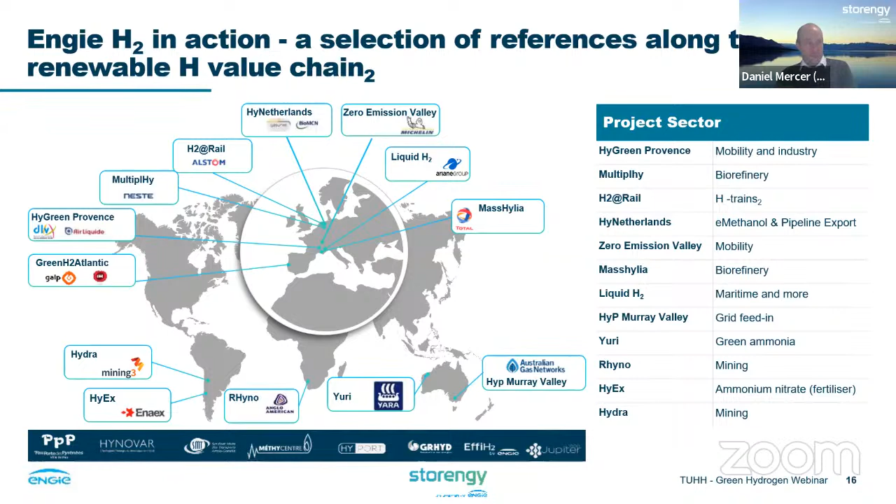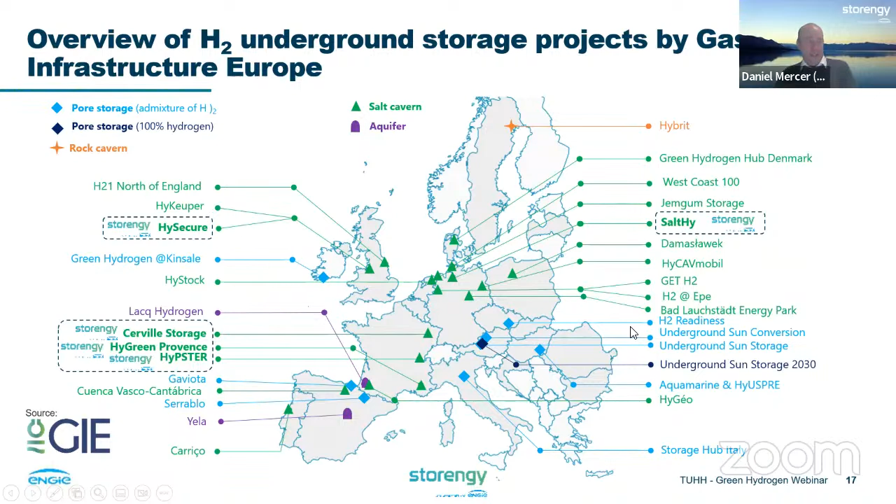The project of Storengy I've highlighted. We have a number of projects in France, one in the UK, and one in Germany. The first project that we're aiming at and developing and pushing forward is the project in France called HyPSTER. This was the first project to be funded by the European Union, and we are working on it with various partners from various parts of Europe, some from within the EU and some from without.

The first project is actually to test storing hydrogen in a cavern that was designed initially for methane, but it's a cavern that is not being used right now for methane. It's the first small one. It would be filled with brine, and then we will test pushing the hydrogen in, and we will test a high level of cycling of this cavern, and then we will draw conclusions and share them with the public, as the project is funded with public money.

And when the project is successful, when we've determined the right parameters to operate it in, we will be going for the larger cavern, one that is more of a commercial size. This is a project that we are doing with a number of partners, and we aim at starting the testing this year.

Construction works had already started last year.

Interestingly enough, the project is, as many other storage projects, linked to a concept of production and consumption of hydrogen locally, of course, because the grids that will be required to transport hydrogen over large distances will probably only come at a later stage. So in the beginning, these projects are not started or planned in isolation from the rest of the world. They tend to be integrated into a first kind of hydrogen project that foresees generally uses in mobility and industry.

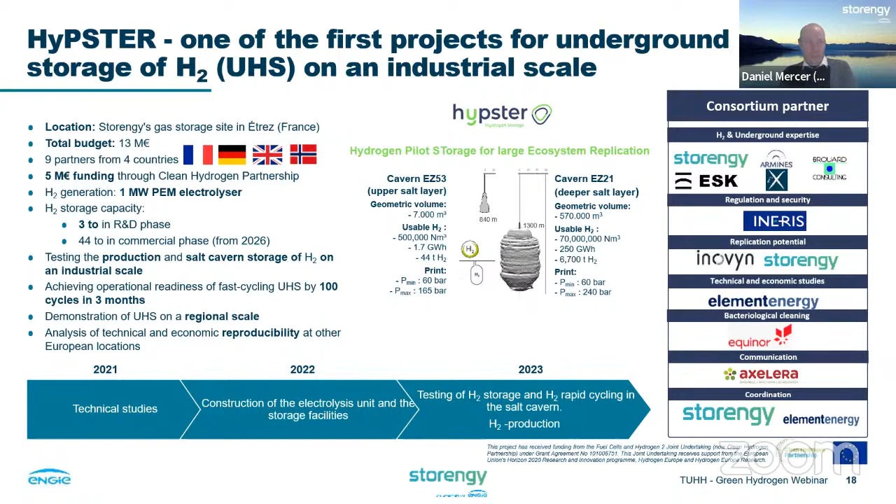So we believe, for example, that this is a good place, given that the geology allows it as well. This is a good place to develop further storages of hydrogen in various molecular forms and to store it in salt caverns in that area.

How long does it take to realize such a project? That's also a point. If you're talking about a new project, it can take 7 years to actually get this project online. This is why these projects also have to be thought of and planned on the very long term. And of course, once we've made such a salt cavern, we are probably going to operate it for 50 years plus. So these are very long-term investments.

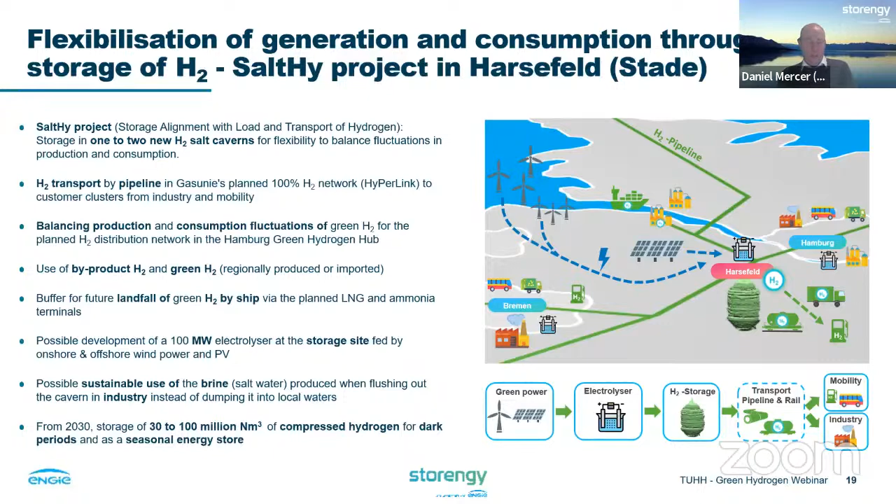So that was an overview of how we see the possibilities to store hydrogen underground in salt caverns, a view of how ENGIE intends to do it. Should you have any questions, feel free to ask.

Yes, thank you very much, Daniel. Thanks again to all speakers for that very interesting 3 presentations we have heard today. It was really great to get those insights from you as experts from the field. I think we are already quite advanced in time, but nevertheless, let's try to have a short discussion round, maybe 2 or 3 questions. So I would like to start with a more general question.

Today we have learned about various options for transporting and storing hydrogen. We have also seen that all of those options are particularly suitable for specific fields of application. Nevertheless, all options require dedicated infrastructures. When we're speaking about pipelines, storage for gaseous hydrogen, importing of ammonia, importing of LOHCs, there we need dedicated infrastructures. And especially when we're talking about large-scale deployment, considerable effort must be paid to build those necessary infrastructures. So my question would be: do you think that we can actually afford to operate several infrastructures in parallel, or will it be better to focus on one system and only operate one infrastructure? How do you see this?